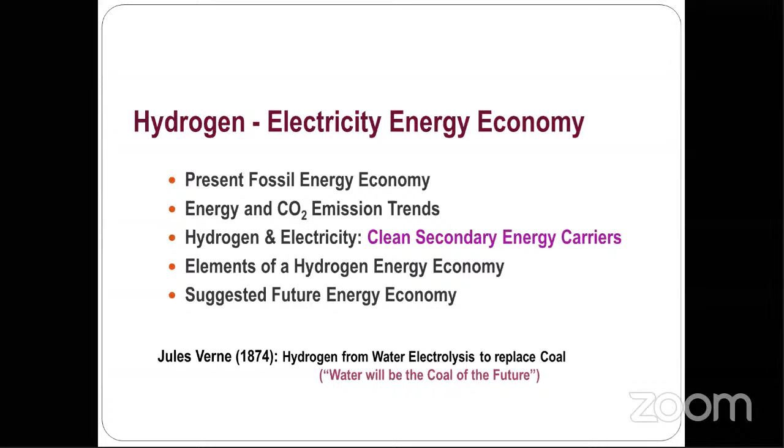Now we will discuss the global environmental challenges. Over the past several years, we have had economic growth, but that is also bringing some environmental issues, like climate change, air quality, and energy security. These challenges are giving opportunity for the automotive industry to change.

If you see this climate change, we want to reduce the CO2 emissions. We have the Paris agreement for 2050, and India will reduce the CO2 emissions before that.

Then we have the air quality problem, like regulation of NOx and so on. Some countries have already taken policies to reduce the NOx.

Again, we have another problem regarding energy security. Recently the Prime Minister has taken a policy, a step called Atmanirbhar Bharat, meaning self-dependency. So in that case, we have to look towards renewable energy development.

Based on all these things, the automotive industry is facing challenges as well as opportunities. So based on this context, we have to avoid fossil fuels. We divided this fossil fuel phase-out into two processes: the first phase is phase-out of fossil fuel vehicles, and then we are going to phase out fossil fuel based power plants.

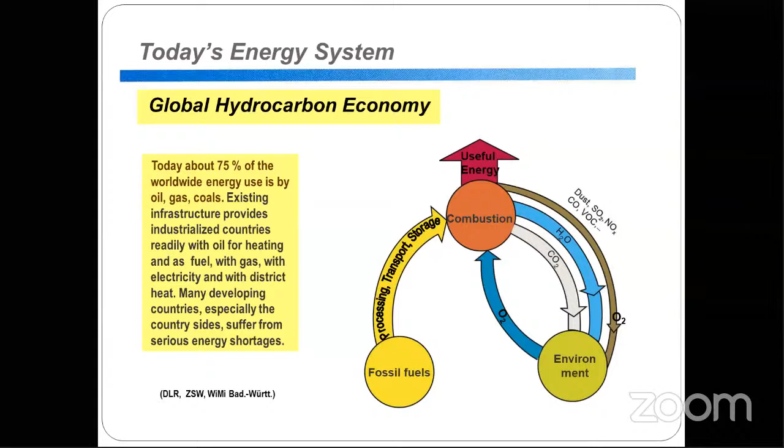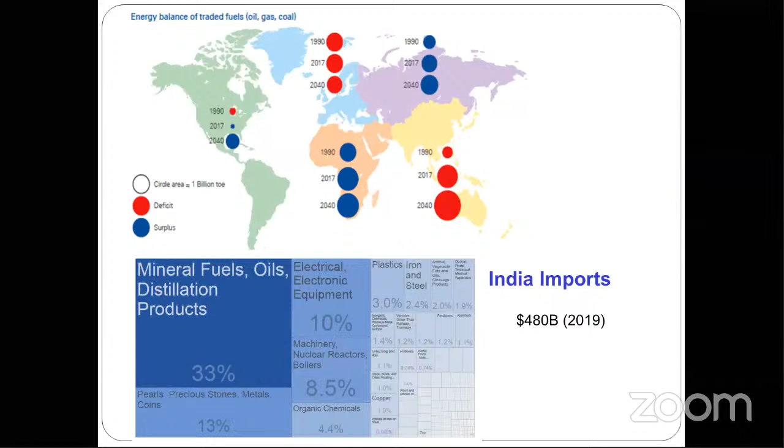If you see in India, maybe in 2020 the energy demand, and after 2040, the energy demand is going to double because our standard of living is increasing drastically, because of energy consumption from homes as well as industries and industrial processes. So we have to generate so much electrical energy. If you want to generate that much energy, you can't depend upon fossil fuels, so you have to go with renewable energy share. Then only you can reduce your CO2 emissions with respect to the Paris Agreement.

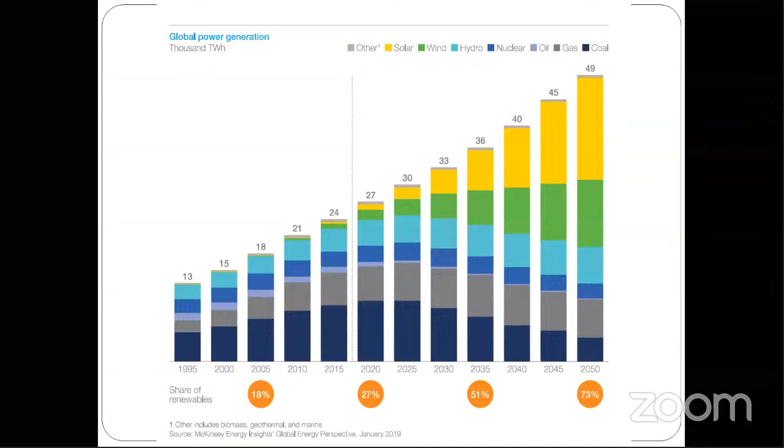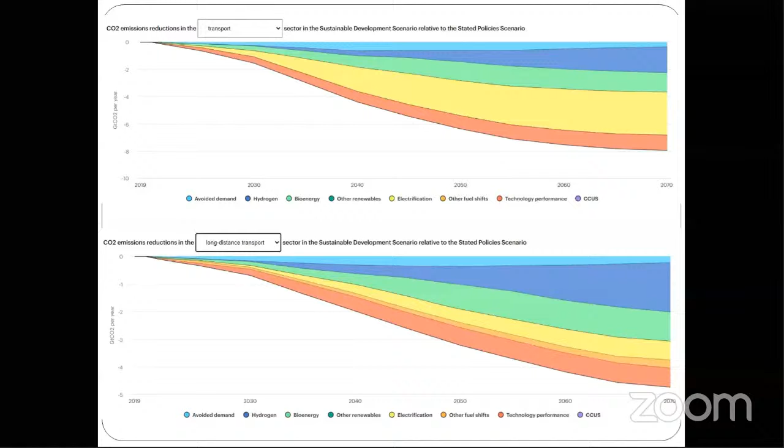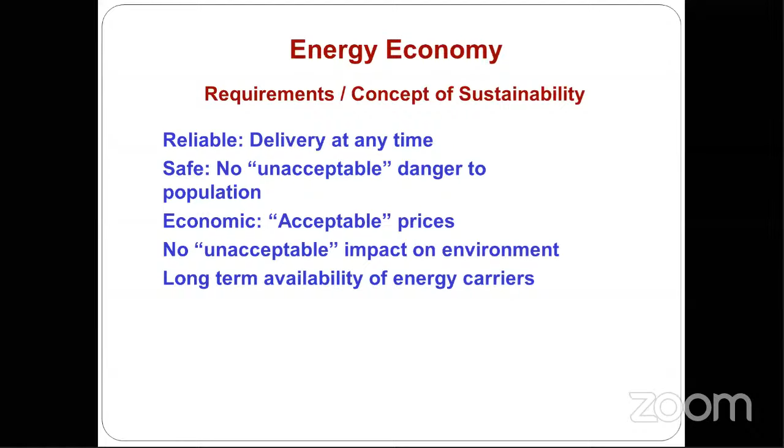Now, if we discuss about the energy economy concept of sustainability - without having any global warming effect, and without depending upon other countries. The energy source should be reliable, delivered at any time, and it should be safe with no unacceptable danger to population. Economically, it should be at acceptable prices, like your solar PV - the tender cost now is 2 to 2.5 rupees per kilowatt hour - and no unacceptable impact on environment, with long-term availability of energy carriers. These are the requirements coming from the concept of sustainability.

Then we have to tackle this global warming from both sides - demand side as well as supply side. From the demand side, you have to design very efficient appliances like air conditioning systems and transport vehicles, then you can reduce CO2 emissions. There is a prediction that if you go for highly efficient end-user applications, you can nearly reduce 80% of projected CO2 by 2030, coming from only the demand side.

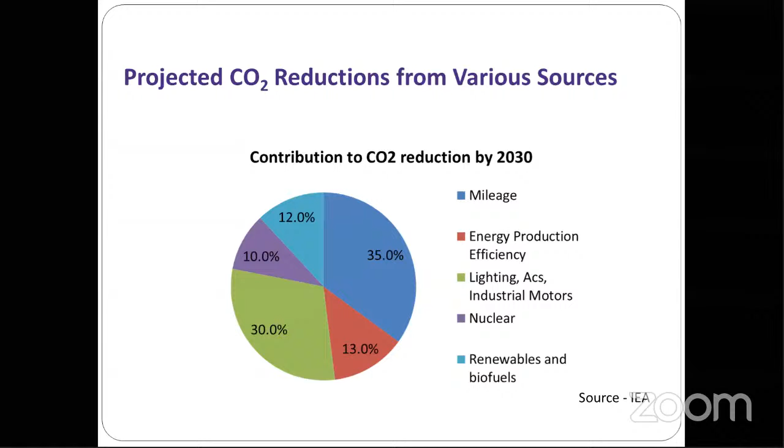Then I will show some policies taken by different countries. First, the European Union agreed to cut around 30% of truck and bus CO2 emissions by 2030. Then, looking at the policies from Norway, they want to ban combustion engine vehicles from 2025 - after 2025 in Norway, they won't sell any combustion-based vehicles. If we take UK and France, they want to ban diesel engine vehicles from 2040, and Germany also has taken some policies to reduce these internal combustion vehicles.

We can also see Asian countries - China has also adapted, moving towards hybrid vehicles, and Korea is planning to ban diesel vehicles from 2030.

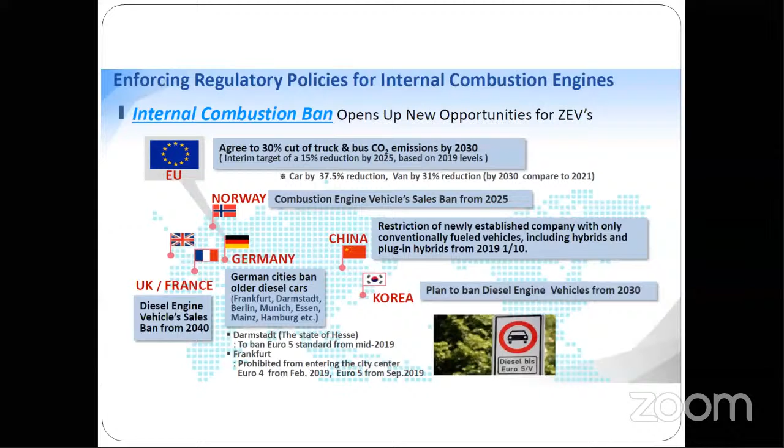So we have two options for going for green vehicles. Either you can use electricity-based vehicles like battery vehicles, or you can go for hydrogen-based vehicles. You can see the replacement of oil for the transport sector, because most countries' policies are aiming that by 2030 or 2040 they want to ban fossil fuel vehicles.

Then what are the long-term options we have? Natural gas will reduce emissions compared to diesel and petrol, but it is still not a long-term solution. Then we have second generation biofuels, which can also reduce CO2 emissions, but the problem is that it can impact the food situation, since we are using land and impacting the environment by cutting forests to cultivate these biofuels, along with use of fertilizers and irrigation and water problems.

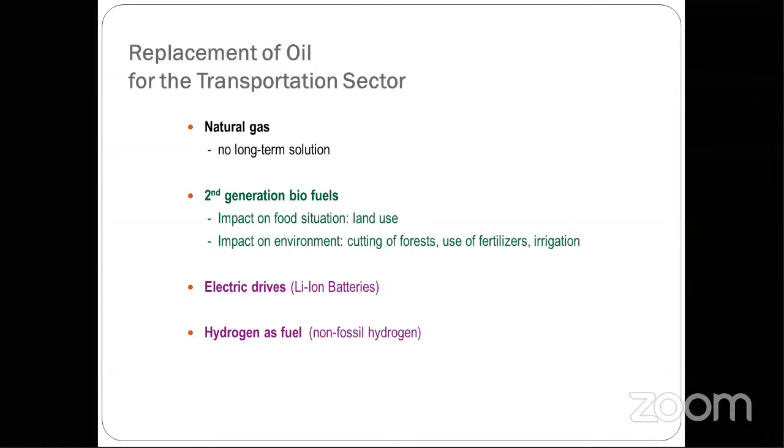First you use the battery, then if the battery is dead, you can go with the ICE engine. So that is hybridization. The next level is electrification, pure clean mobility vehicles, either going with battery vehicles or hydrogen fuel vehicles.

So here I'm going to explain the difference between the fuel cell and battery. Basically, these two are electrochemical devices. Both work on the same principle, but these are not the same.

If you see the fuel cell, chemicals continuously flow to the fuel cell to generate electricity. Whereas in a battery, the chemicals stored inside will be used to convert to electricity. The fuel cell will produce electricity continuously as long as you supply the fuels, whereas the battery, once used, will go dead after a certain period.

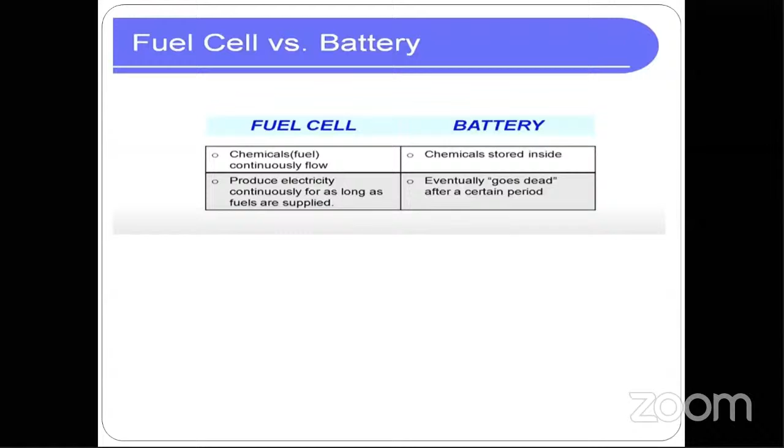So here I want to show the principle of the fuel cell. This fuel cell will have two electrodes and one electrolyte, similar to our battery. You supply the hydrogen from your source to the electrode from the anode side.

So what would happen here? It will dissociate into protons and electrons. From this membrane, the proton will transport, whereas it will stop the electrons. The electron will go to the external circuit. Then it will come to the cathode side, and react with the proton, electron, and oxygen from the air, producing water vapor or water. So this is the principle of the fuel cell stack.

Basically, it will convert the chemical energy from the fuel directly into electricity, and it can produce this electricity with high efficiency compared to an IC engine. So the efficiency of the fuel cell is higher than IC engine efficiency, and there is no noise, because there are no moving parts. We have a small blower to supply air to the fuel cell stack, and the advantage is it can generate power in a stable way, reducing expensive power transmission, with less pollution.

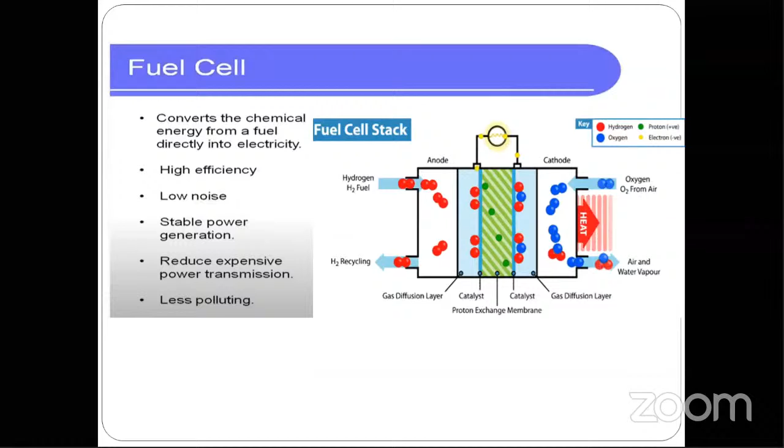So here I want to show a small video about this fuel cell. Then you can understand.

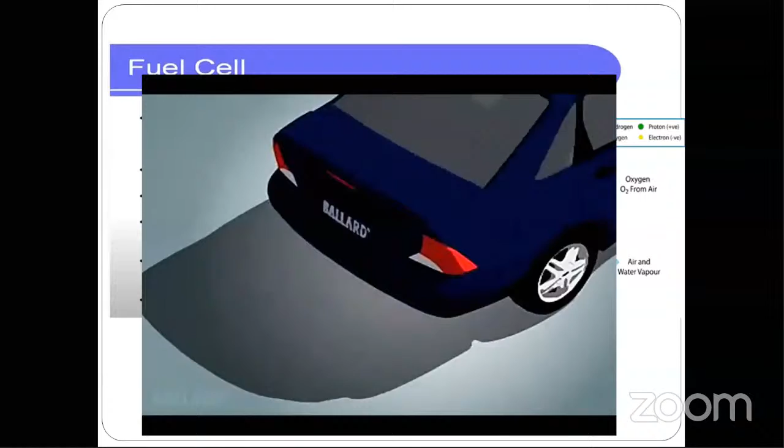So it was a nice video from Ballard. Ballard is actually one of the pioneers in manufacturing fuel cells.

Now I'll show the difference between fuel cells and batteries. As you can see, battery-based vehicles are already on the road, but fuel cell-based vehicles are still in development mode, with some running in Japan, USA, and some European countries. But there is a small difference between these fuel cell vehicles and battery vehicles.

You can see this is the energy storage system volume. If you use battery-based vehicles, as you increase the range, the volume increases drastically, meaning the battery volume will be very high. So obviously your automobile size will also increase, and your electricity consumption will increase.

So obviously, for battery vehicles, there is no competition for low range. If you go within the city, fuel cell vehicles cannot compete with battery-based vehicles. But for long range, like more than 150 kilometers or miles, for buses and heavy trucks, you cannot use batteries because the recharge time is high. It can run only for 50 to 100 kilometers, and recharging takes time. So if you go for hydrogen-based vehicles for long range applications, you can refill within 5 minutes and go for long range like 500 or 1000 kilometers.

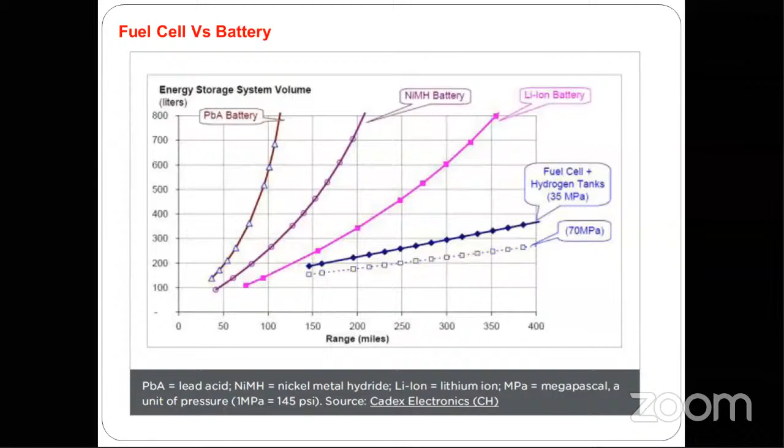So what is the difference between hydrogen and electricity? Basically, both are energy carriers, and they can meet the requirements of all user sectors. If you see the difference, you can store hydrogen easily compared to electricity. But electricity storage cost is higher compared to hydrogen or thermal energy storage cost. That's why we cannot store high amounts of electricity in batteries.

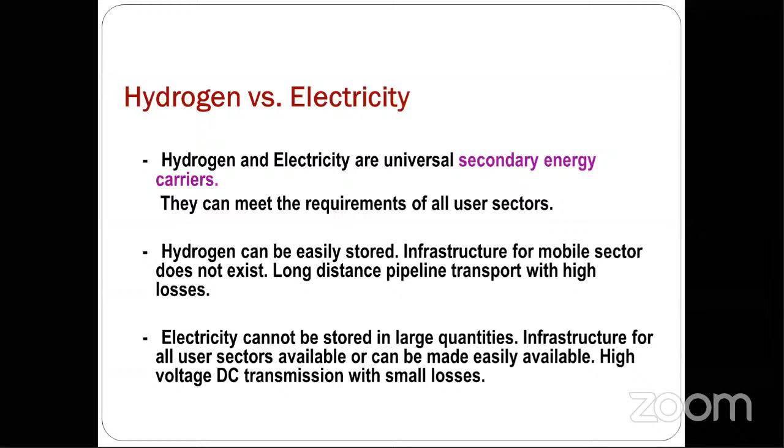As I said, electricity cannot be stored in large quantities. If you want large quantity storage, you should have a lot of batteries, and again the capital cost will be higher. Also, one more problem with batteries is durability—how many times refilling may happen, we don't know.

So why does hydrogen deserve attention? Hydrogen is the smallest of all atoms and has high energy content per unit weight. Compared with gasoline, it has 3 times more energy per unit weight. That is the major advantage of hydrogen, and why we should consider hydrogen as an energy carrier.

One more drawback of hydrogen is that it has very low energy density per unit volume, meaning it requires large storage tanks. But this drawback can be reduced by compressing the hydrogen, or we have other storage methods to increase storage capacity. We started with solids in the 19th century before, then moved slowly to liquids, and the future will be with gases, maybe after 2050. So hydrogen will play a major role in the transport sector.

Here you can see what the hydrogen energy system is, from production to end user. You have to generate hydrogen from various sources, because although hydrogen is abundant in nature, it is not available in free form. It is combined, like in the form of water H2O, or combined with fossil fuels like natural gas, CH4. So to generate hydrogen, you have to supply energy—that is an important factor for this hydrogen economy.

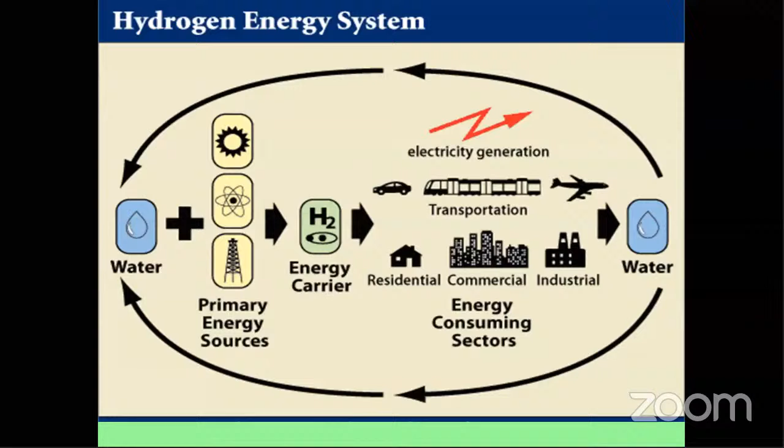So here I will show the world hydrogen economy. Before this, we have seen the hydrocarbon economy. Now we'll see the world hydrogen economy, which is the future economy.

Here we are producing hydrogen by using renewable energy sources. You cannot produce hydrogen from fossil fuels, as that will again give pollution. You have to generate hydrogen from renewable energy sources. Then only it can be called a clean energy carrier.

That hydrogen we can use for transport or some other purpose like combustion, to generate thermal energy. In this cycle, we are using water for generating hydrogen. Again, when combusting or producing electricity in a fuel cell, it is again forming water. So by using hydrogen as an energy carrier, we are not producing any harmful gases to the environment.

As shown in the video, if you see this hydrogen fuel cell electrical vehicle, we have different parts. We need a hydrogen storage system, to supply hydrogen to produce electricity for a long time. Then we should have a fuel cell to convert this stored hydrogen into electricity to drive the automobile vehicle. Then we should have a motor.

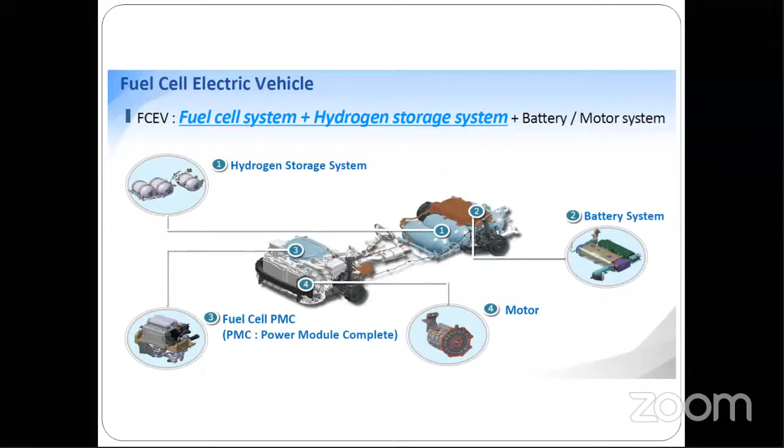So if you see this, the electrochemical reaction of hydrogen and oxygen. As you know, if you combine hydrogen and oxygen in fuel cell mode, it will generate electricity plus some water. Whenever you want to produce hydrogen, in the opposite reaction, you use water and electricity to produce oxygen as well as hydrogen. So this is the basic reaction for fuel cells as well as electrolyzers.

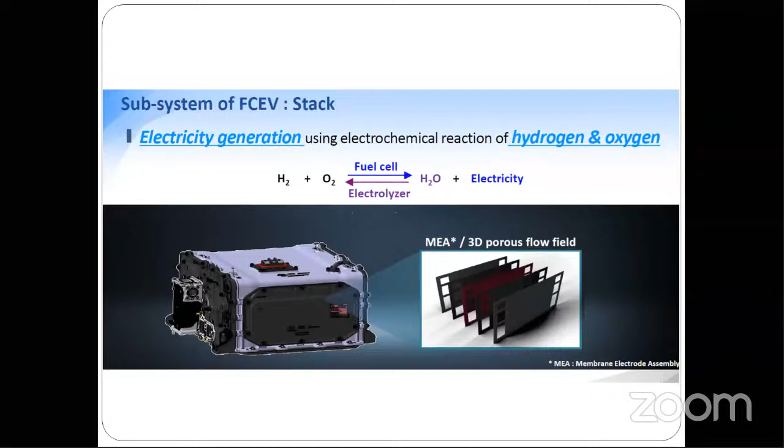So here you can see the different types of fuel cells. We have the PEM fuel cell, called the proton exchange membrane fuel cell, direct methanol fuel cell, alkaline fuel cell, phosphoric acid fuel cell, molten carbonate fuel cell, and finally solid oxide fuel cells. So we have a number of fuel cells.

These fuel cells operate a little differently compared to each other. Some fuel cells we are supplying hydrogen, and some fuel cells we are supplying like fossil fuels and so on. If we look at the temperature range, each one has a different temperature range. The applications also will be different based on this temperature range. Just we'll see here.

If we see the direct methanol fuel cell, here we are using electrolyte as a proton conducting membrane, similar to the PEM fuel cell. But if we see the alkaline fuel cell or phosphoric acid fuel cell, we have different electrolytes, like concentrated phosphoric acid for one, and potassium solution for the second. Then the molten carbonate fuel cell uses molten carbonate as electrolyte, and the solid oxide fuel cell uses ceramic material as an electrolyte.

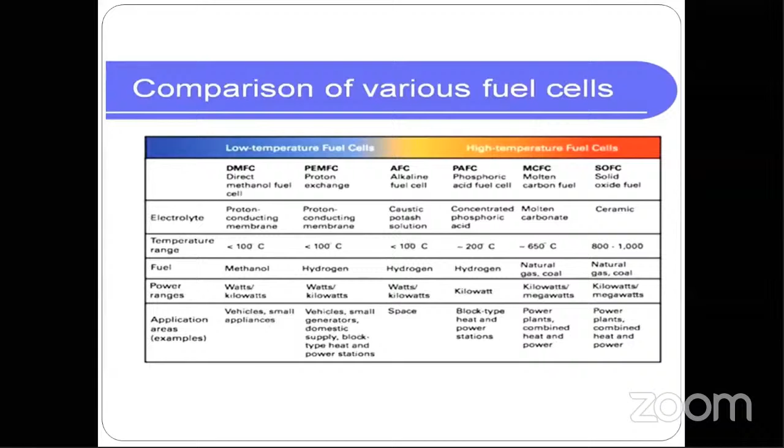So as I explained, this polymer electrolyte membrane fuel cell, the PEM fuel cell, is best suitable for transport applications.

So here we can see the brief history of the PEM fuel cell. Basically, the concept started in 1839, given by Sir William Grove. He demonstrated the basic operating principle of the fuel cell.

Then it was reinvented by Francis Bacon, who started working on practical fuel cells in 1937. By the end of the 1950s, he was able to develop a 6 kilowatt fuel cell — a tremendous effort, since he started in 1937 itself.

Then the first practical application was done by General Electric, called GE, for the Gemini program in the 1960s for NASA application.

Then we started for terrestrial applications. General Motors experimented with a fuel cell powered van with cells from Union Carbide in the mid-1960s. After that, they forgot about terrestrial applications for this fuel cell, and it was only used for space applications.

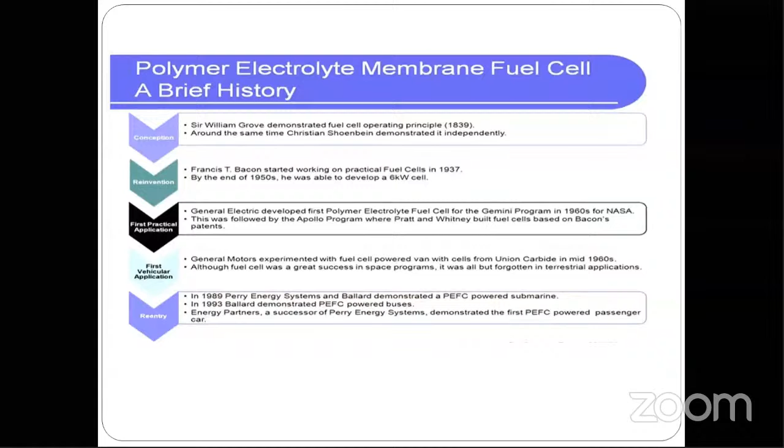Again, fuel cells re-entered in 1989. Perry Energy Systems and Ballard demonstrated a PEM fuel cell powered submarine, and in 1993 Ballard, as shown in the video, demonstrated PEM fuel cell powered buses. After that, the movement started to develop these PEM-based fuel cells for transport applications. So this is the brief history of PEM-based fuel cells.

So here you can see the PEM-based fundamentals, what we have discussed and what I have shown in the video. So here we have a bipolar plate — basically it will supply the fuel as well as remove the reactants.

And here you can see we have a gas diffusion layer, which will distribute the fuel as well as reactants. Then once the fuel, the hydrogen, comes to this catalyst layer, it will dissociate into proton and electron. The proton will transport through the membrane.

Then again, here there's one more reaction with proton, electron and oxygen coming from the gas diffusion layer. It will form water and it will be removed from this side. This is the basic structure of the PEM-based fuel cell.

Here you can see the basic reactions: at the anode, as I explained, H2 will be dissociated into protons and electrons. At the cathode side, the oxygen, proton and electron will combine to form water vapor. The overall reaction: hydrogen plus oxygen goes to water.

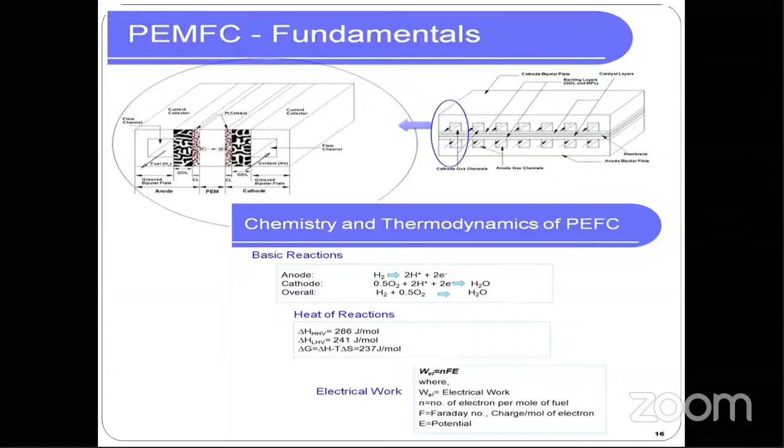Assuming all the Gibbs free energy could be converted into electrical work, the maximum cell potential we can achieve theoretically is around 1.23 volts — that is the maximum voltage from one cell. Based on this, you can calculate how much efficiency you can generate from the fuel cell. If you go with HHV, you can produce around 83% conversion from hydrogen to electricity, whereas if calculated based on LHV, that will give 94%. So this percentage is very high in terms of energy transfer from one form to another, like chemical to electricity.

If you see these IC engines, the efficiency is just 30 to 50% maximum we can get. Compared to that, fuel cell is highly efficient compared to IC engines.

Maybe you have some doubt how it can convert more efficiently than Carnot, because Carnot says that the Carnot engine is the highest efficiency. So there is a myth here. Basically, this PEM fuel cell is not a heat engine but an electrochemical engine, so therefore this Carnot efficiency limit is not applicable here.

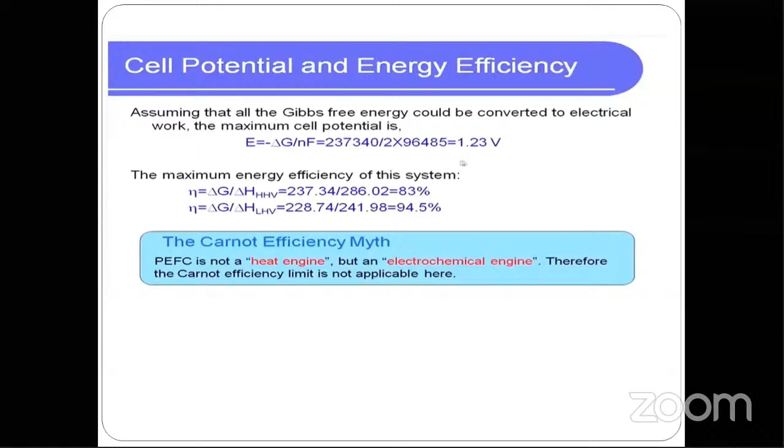Now we'll see the different components of fuel cell. First we'll see the electrolyte. Basically, this is a polymer membrane electrolyte. This PEM derives its name from polymer electrolyte membranes.

The role is these membranes are solid electrolytes that can conduct protons but are impermeable to gaseous phase. This electrolyte has to transport only protons.

That is the main role. If you see the materials, what we are using here, we are using this perfluorocarbon sulfonic acid ionomer. Basically these are called Nafion membranes. Nafion is the best known membrane till now, produced by DuPont company.

The thickness, if you see, is very small, 20 microns. The desired properties for electrolyte: it should conduct the protons efficiently, and also it should be chemically inert and mechanically strong against swelling. So this is the basic function of electrolyte.

Then if you see the catalyst layer in PEM fuel cell, the catalyst layer is very thin. It is in between the electrolyte and gas diffusion layer, as I showed in the video as well as the previous slide. The role is the desired reactions take place at this site and current is produced.

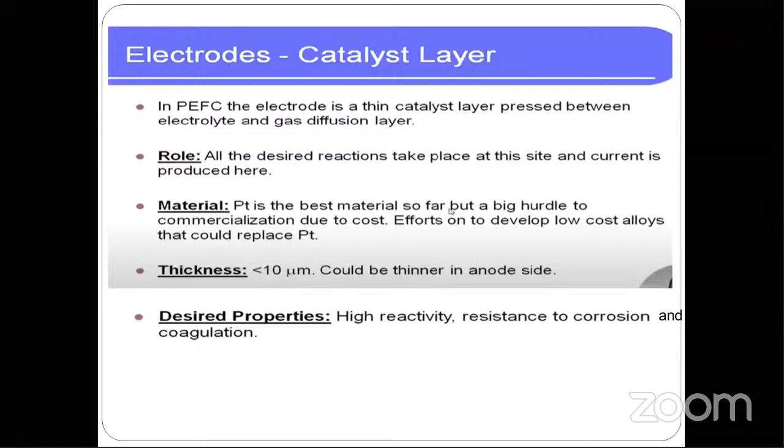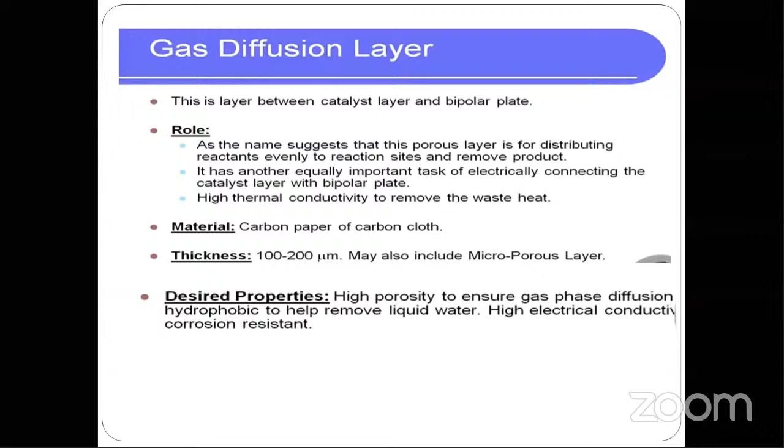Then finally, we have the bipolar plate. Basically, this is called the current collector. This is the outermost component with the gas channels, supplying reactants or removing products.

Basically this is the outer layer of the cell. The role here is it is connected to the outer circuit and drives the current, and also removes the waste heat generated in the fuel cell, because as I explained, this reaction is exothermic, and it should provide structural strength to the total cell. The material basically used is graphite.

Thickness is the highest for this material in the fuel cell, up to 1 mm. The desired properties are high electrical and thermal conductivity, to transfer electricity as well as heat to adjacent layers, along with corrosion resistance and mechanical strength.

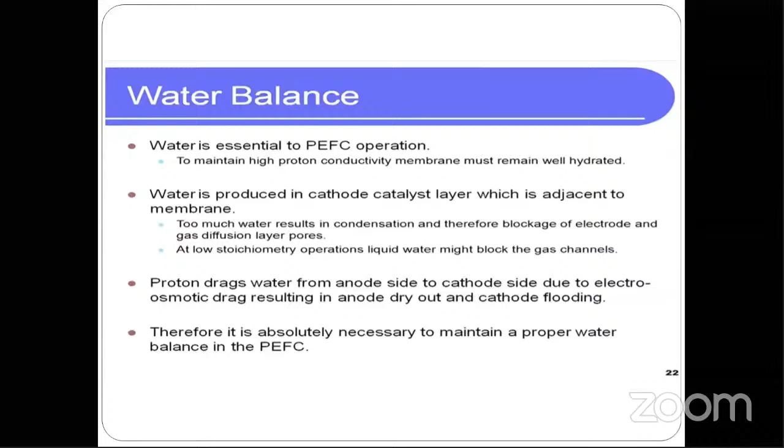Now moving to hydrogen production, the present technologies. At present, we produce hydrogen from various processes. The major stakeholder is steam reforming of natural gas, producing around 48%. Then partial oxidation of heavy hydrocarbons, contributing 30% of global production, and partial oxidation of coal, producing around 18%. Then we have electrolysis, around 4% of global production.

But if you want to use hydrogen as a green fuel or clean energy carrier, you have to produce it from renewable energy sources, not from steam reforming or partial oxidation, because at present the hydrogen production cost from electrolysis is higher than the other processes. That's why the majority is produced from steam reforming or partial oxidation of heavy hydrocarbons. But now, electricity cost from solar PV is decreasing drastically, around 2 to 2.5 rupees per kilowatt hour, so hydrogen production cost from electrolysis will also reduce further.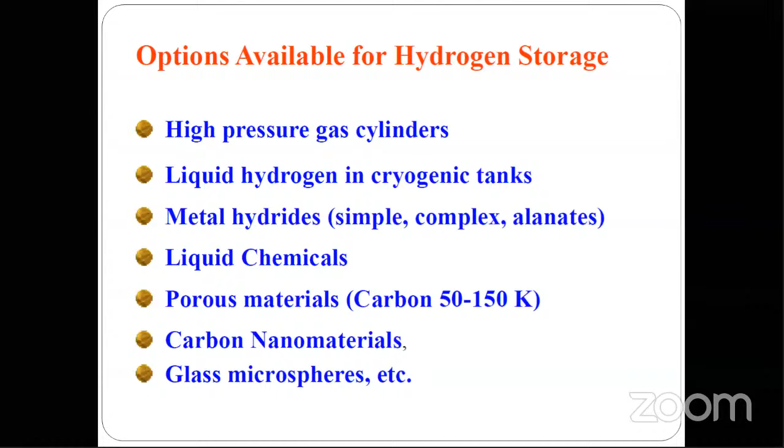We'll see these one by one, starting with the conventional methods. The first conventional method is high pressure gas cylinders. Hydrogen is a very light gas, so it will take a huge volume if stored at atmospheric pressure. So to reduce the volume, we pressurize the hydrogen up to 800 bar.

But the problem here is that it is not safe to have an 800 bar or 700 bar cylinder with you in the vehicle. Another disadvantage is that to pressurize hydrogen to 300 bar, you have to spend around 18% of the hydrogen's energy. So just for compressing, you are already losing 18% of the energy from the hydrogen. That is one of the main drawbacks of high pressure gas cylinders.

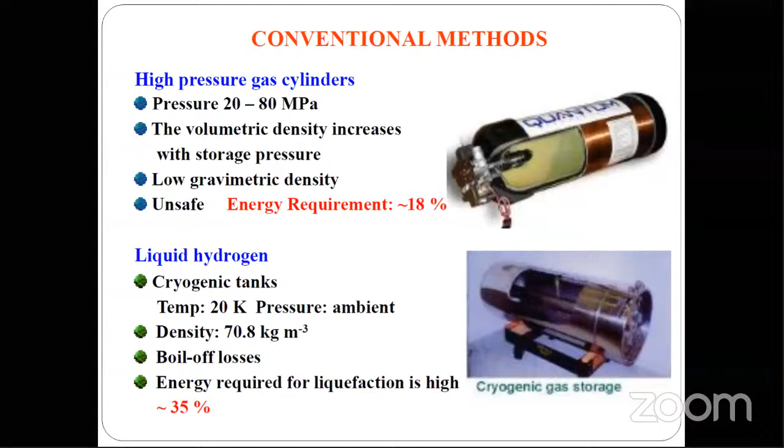For transport applications, the Department of Energy of USA has set targets: for transport vehicles, we need storage capacity around 5-8%, and operating temperature should be minus 20 to 50 degrees centigrade. The refilling time should take only 1 minute for refilling around 0.5 kg of hydrogen. The delivery pressure from the solid cylinder should be above 2 bar, because this has to supply to the fuel cell to generate electricity. So these are the storage container requirements from the Department of Energy USA, that is called DOE. They have set these conditions to design the proper storage tank for hydrogen based vehicles.

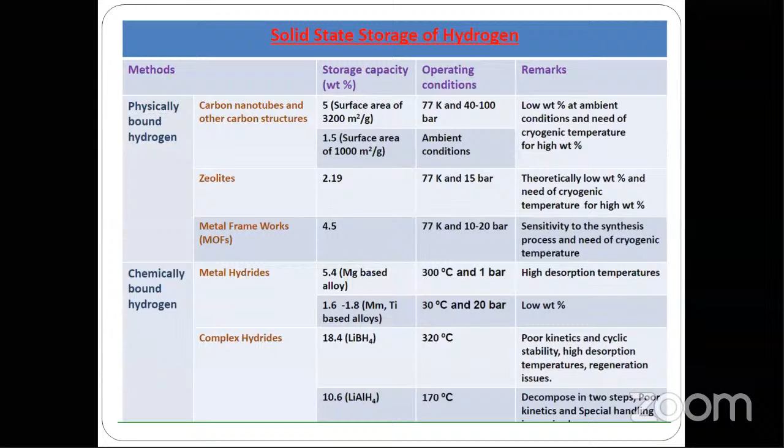Then if you see the metal hydrides, the reversible chemical heat storage. Here we are using some intermetallic compounds forming with different metals by either using ball milling or melting for hydrogen storage operation.

If you see the reactions, absorption is like you have a material, metal, which combines with hydrogen to form metal hydride, and since the reaction is exothermic, it will release some heat. If you want to get back this hydrogen, you simply supply heat. Then the metal hydride will release hydrogen and become intermetallic again. So the operation is very simple - if you want to generate the stored hydrogen from metal hydride, just supply heat at different operating conditions, and you can get the hydrogen from the storage tank.

If you see the heat values, we have 15 to 75 kilojoules per mole. For low temperature applications, that will be around 20 to 30 kilojoules per mole, whereas if you go for magnesium based hydrides, you have to give a high amount of energy.

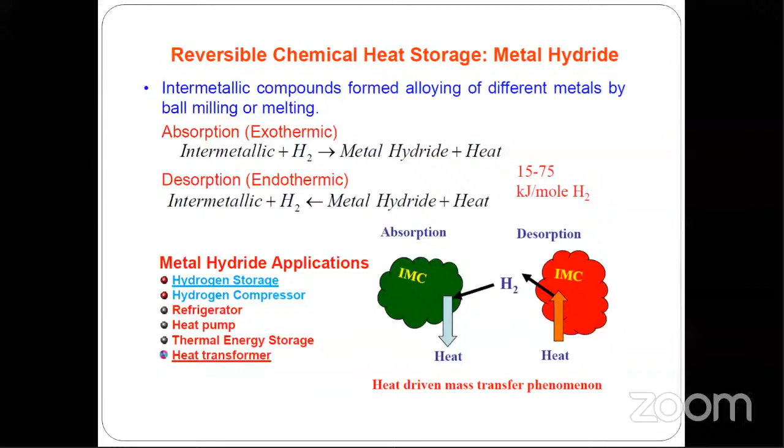The absorption process completes. Desorption is the reverse - hydride decomposition. Again we have diffusion, surface penetration, and recombination and desorption to the gaseous phase. So in desorption process you get the hydrogen, whereas in absorption process the hydrogen is absorbed by the metal hydride.

So you can say metal plus hydrogen becomes metal hydride. In the absorption process it releases heat - an exothermic reaction. In the desorption process, you just supply heat, and it will recombine into metal plus hydrogen.

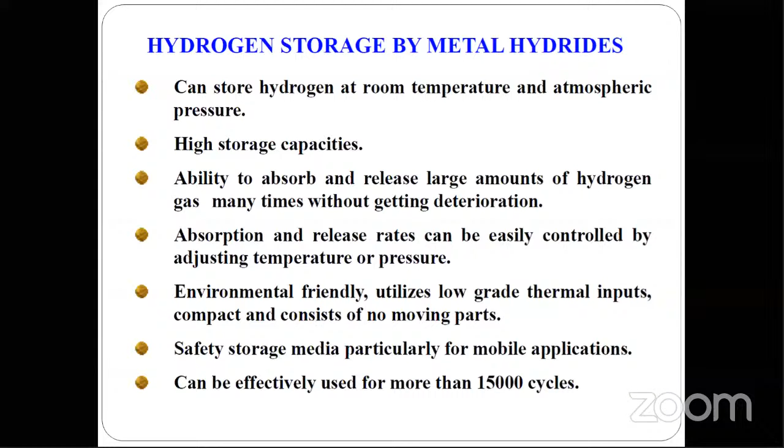Here you can see the PCT isotherm for hydrogen absorption. Once the hydrogen absorbs, the concentration increases, and after the limit, the pressure will increase again. These are shown at different temperatures and pressures. Based on these pressures and temperatures, we can construct many engineering applications using these metal hydrides to convert energy from one operating condition to another.

So energy conversion takes place from high temperature to low temperature and low temperature to high temperature. These are the various energy conversion devices - you can use these metal hydrides for heat pump, refrigerator, heat transformer, and thermal storage. Professor Anil Kumar will explain about these various applications of metal hydrides.

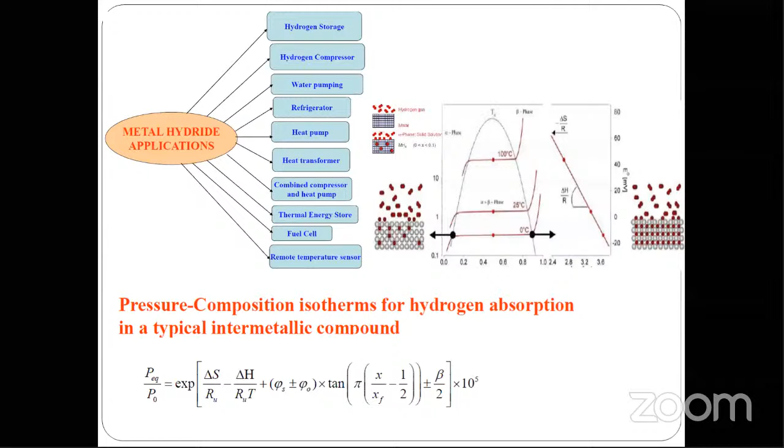So the advantage is that it is basically environment friendly. It can use low grade heat energy and is compact in construction. And if you see these devices, there are no moving parts, no liquid circuit. Hence it can operate at any orientation, not like our absorption systems like heat pumps. And these reactions can be controlled by varying supply pressure and temperature, as these are heat driven mass transfer phenomena.

So I have explained why hydrogen is the alternative fuel, given the limited availability of fossil fuel and increasing energy demand. We can also see that hydrogen has the highest gravimetric energy density compared to gasoline, almost 3 times higher. Also, hydrogen based fuel cell vehicles can convert this energy from one form to another with up to 90% efficiency, whereas in case of IC engines you get only 45% conversion efficiency.

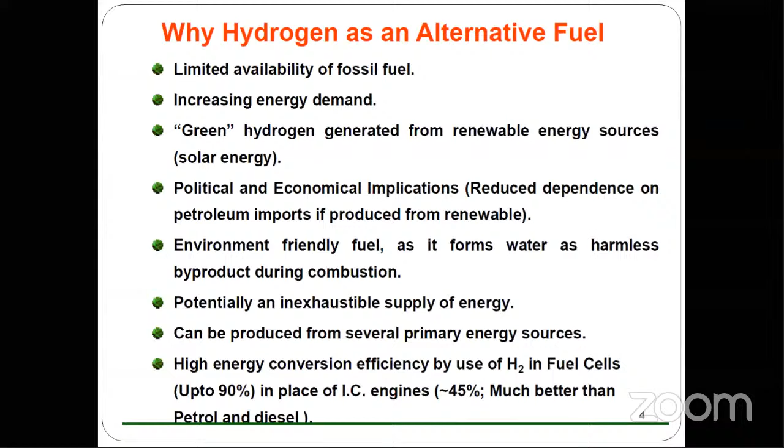As I told, if you want to desorb the hydrogen, you have to supply heat because it is an endothermic reaction. So we are supplying the energy with respect to water. Also, if you see the metal hydrides, the problem is that they have very low thermal conductivity. So if you want to supply heat to the metal hydrides to desorb the hydrogen, you have to enhance the heat transfer within the tank. So here we have used a fin type heat exchanger to enhance the heat transfer in the storage tank.

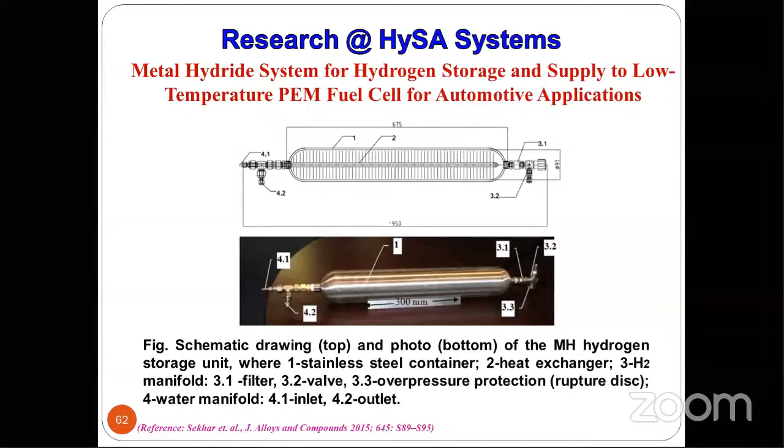So the fifth one is the heat exchanger from the metal hydride container, and this is our heat exchanger in the metal hydride container. And the sixth one is air-liquid heat exchangers. And the last part is the fuel cell stack.

So here you see we have integrated these two through thermal integration, because I explained the fuel cell reaction is exothermic. If you supply hydrogen, it will generate both electricity and heat. And again, for this operation of the fuel cell, we have to supply hydrogen from the storage cylinder, and again this reaction is endothermic, so we have to supply heat to desorb the hydrogen. So we have thermally integrated these two: one generates heat, and one needs to take heat to generate hydrogen to supply to the fuel cell. So both are interconnected through heat exchangers.

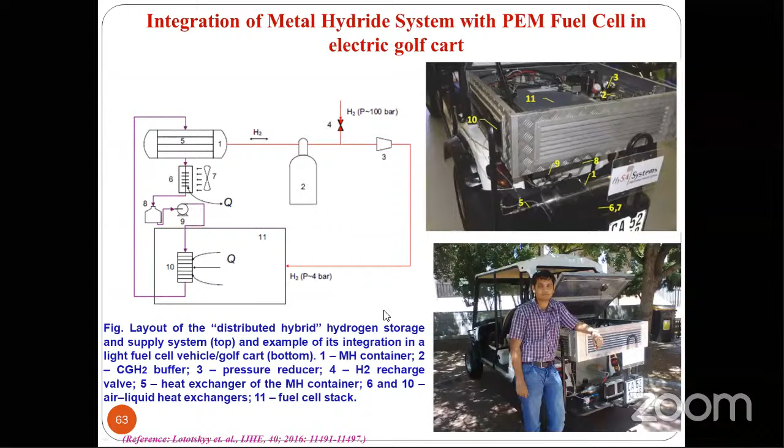So what we have done is initially we removed this buffer storage and tested this fuel cell for a golf cart. It works for almost 1 hour because we used a small container for hydrogen storage, just to test this integrated system and how it is working for the golf cart.

If you see the temperature of this tank, because of low thermal conductivity of these metal hydrides, it is unable to supply heat fast enough at the required rate to generate hydrogen. So it will desorb the hydrogen but take the sensible heat from itself to release it, so the temperature decreases inside the cylinder. Once the temperature decreases, the pressure also decreases as per the PCT curve shown previously.

Because of that, the pressure output supply of hydrogen is less than the required pressure inside the fuel cell, so the fuel cell will stop. Even though it still has some hydrogen content in the cylinder, it is unable to supply at the required pressure because the temperature inside the cylinder is low. So it stopped after 55 minutes.

Next, what we have done is we added a buffer cylinder, and then supplied hydrogen from both. So you are taking less hydrogen from the cylinder compared to the previous case, so the heat requirement will be less, and whatever is supplied will be more than enough to keep the temperature constant.

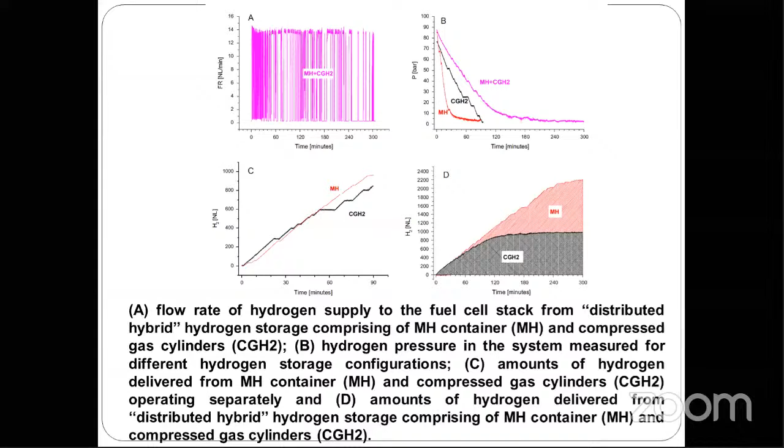We have also designed one more thing, a hydrogen compressor for hydrogen refuel vehicles, because as I explained, if you want hydrogen-based fuel cell vehicles, you need infrastructure to refill the hydrogen. So for that we have many ways to compress hydrogen.

One way is you can compress hydrogen by mechanical compressor, but for that you have to supply high grade energy, that is electricity, which is not an efficient way.

Here we have developed the metal hydride compressor. It can compress hydrogen by taking some waste heat from industries. Suppose you have waste heat at low grade, 120 to 140 degrees, from industry, that heat acts as the driving force to compress hydrogen using these metal hydrides. So we have designed a 3-stage compressor that can take input at 3 bar and deliver hydrogen at 200 bar, up to 5 normal meter cube per hour.

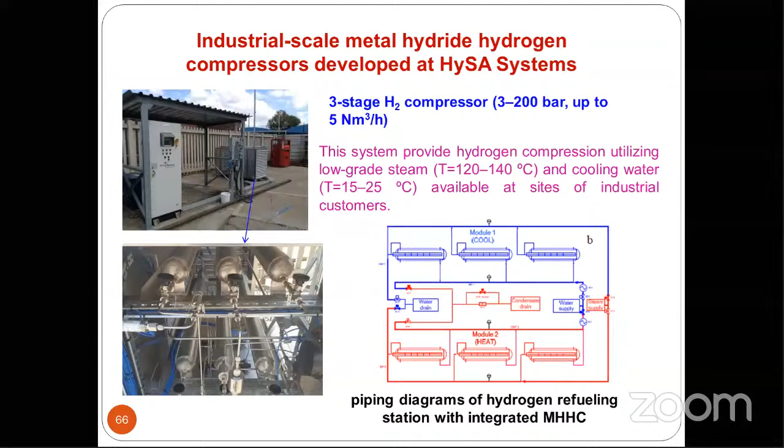So here we have 3 stages to compress the hydrogen. In the first stage, using a different composition, we can compress from 3 bar up to 20 bar. In the second stage, using different material, we compress 20 bar to 50 bar. And in the third stage, 50 bar to 200 bar, again using different materials, because these materials are chosen based on their PCT concentrations, pressure versus temperature and concentration, as I have shown earlier.

So by using this low grade heat, you can compress hydrogen without using a mechanical compressor. We have tested this compressor and it achieved up to 200 bar. This system can be used for hydrogen refueling stations, as we need to generate hydrogen infrastructure for hydrogen-based transport vehicles.

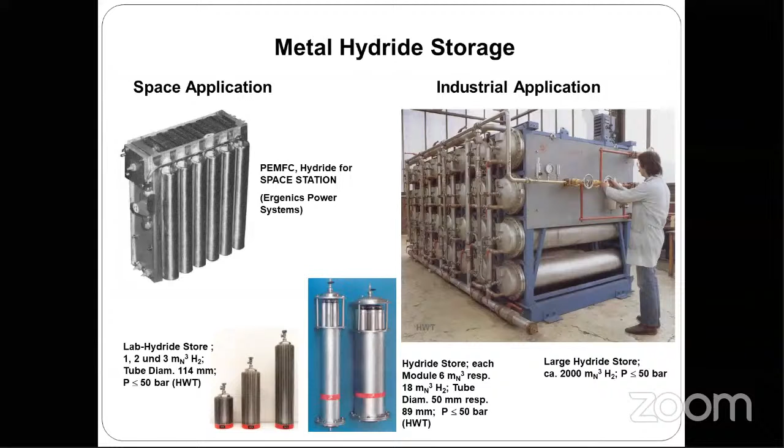Now I'm going to move to the next topic, energy storage. As you know, we are moving towards renewable energy. If you take solar and wind, we have huge potential compared to present world consumption. But the problem is these two are intermittent in nature, so the demand and supply may not match.

So in that case, we should have some storage media to store the energy. Whenever your supply is more than demand, that amount has to be stored, and whenever demand is more than supply, the stored energy has to supply to the grid. The storage media is very important for the next one or two decades, because if you increase your renewable energy share in the grid, the grid has to balance both supply and demand. So if you increase the renewable energy capacity to like 20 to 50%, you need a better storage system to store that amount of energy.

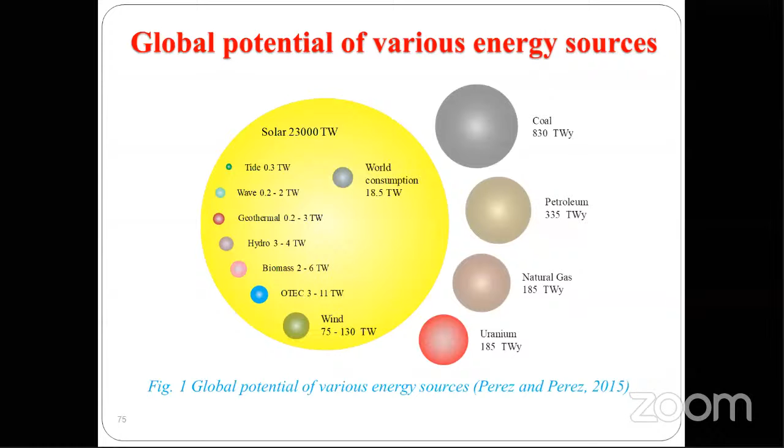So what this system does: whenever the electricity supply is more than the demand, that excess electricity will be used to generate hydrogen using the electrolyzer. Then whenever the demand is higher than the supply from the grid, the stored hydrogen will be used to generate electricity using the fuel cell, so that electricity is supplied to the grid or applications. In this way we can store excess energy from the grid and deliver it whenever demand is more than supply from the renewable energy source.

So this system can be used as a storage media for renewable energy sources. One more advantage is that we are not only producing electricity, we are also producing some heat, which can be used for other applications like space heating, water heating, and so on. Also, for hydrogen-based vehicles, this stored hydrogen can be supplied as a refilling station to supply hydrogen to hydrogen-based vehicles. So this total system can store intermittent renewable energy and supply electricity, hydrogen, and thermal energy.

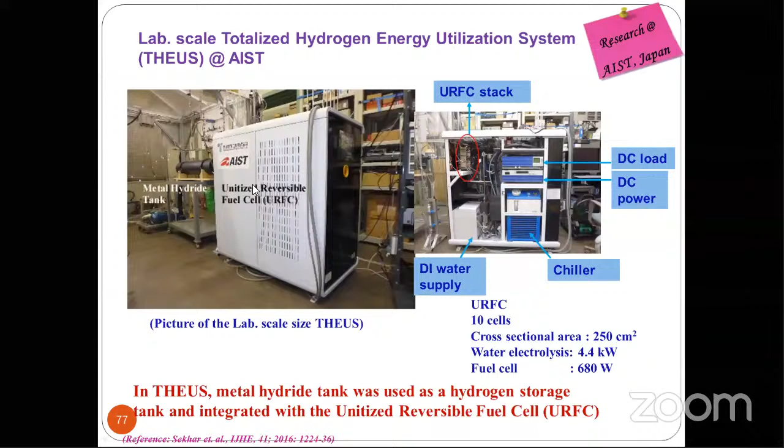So here we have used Nafion 115 as the membrane in the fuel cell. For the catalyst, we have platinum-based catalyst on the hydrogen side and platinum iridium oxide on the oxygen side, and the gas diffusion layer, like carbon paper as discussed, on the hydrogen side and titanium felt on the oxygen side. The bipolar plate we used is titanium-based. This is our stack configuration in the URFC — total we have 10 cells.

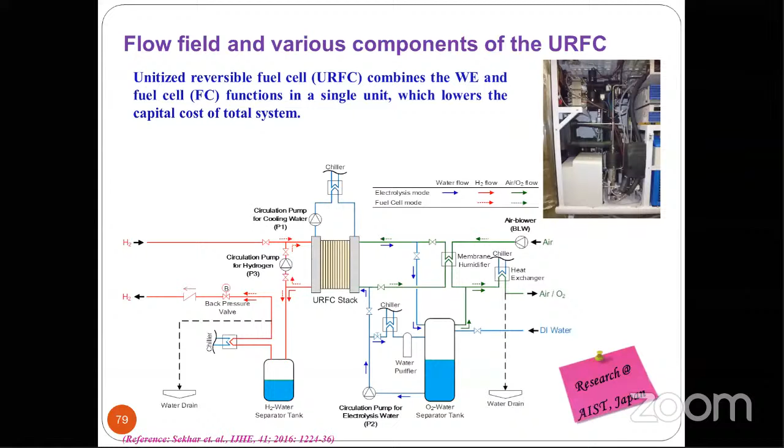And we are controlling the temperature within the fuel cell. So in this way, we can combine electrolyzer operation as well as fuel cell operation in one equipment. So that is the URFC.

As I explained, it can work as both electrolyzer operation as well as fuel cell operation, and also it can bring the capital cost down compared to using individual electrolyzer and individual fuel cell. And it also has a higher operating ratio per device.

Obviously, this device will be used for like 24 hours almost, because either you will use one mode. If you have supply more, then you use electrolyzer mode. If your supply is less and demand is more, obviously you use fuel cell mode. So you'll use this URFC more efficiently, and obviously have less maintenance parts compared to individual systems.

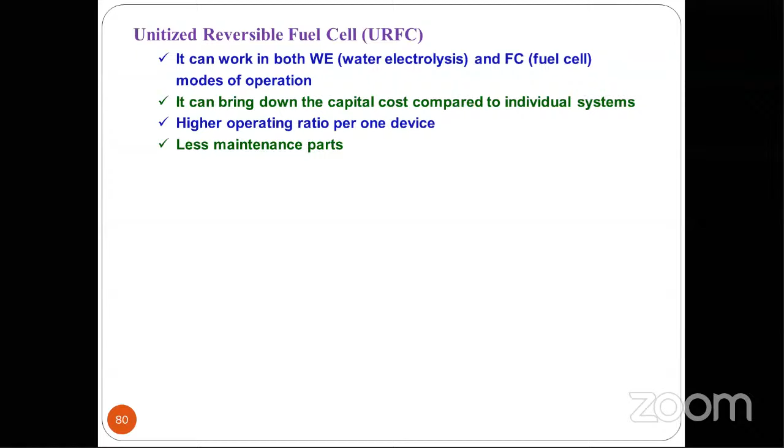Hydrogen storage, as I explained, you can have compressed form, liquid form, and solid form. Obviously, here this is a stationary application - you have to remember that this system is a stationary application. So here the weight is not a problem, so you can use metal hydrides efficiently here to store the hydrogen at ambient pressure and temperature over a long period of time.

So you want to increase this reaction kinetics, meaning absorption, desorption kinetics. Then obviously either you have to absorb, meaning remove the heat fast in the absorption process, or you have to supply heat very fast in the desorption process. So to enhance the heat transfer inside the tank, we use this double coil heat exchanger.

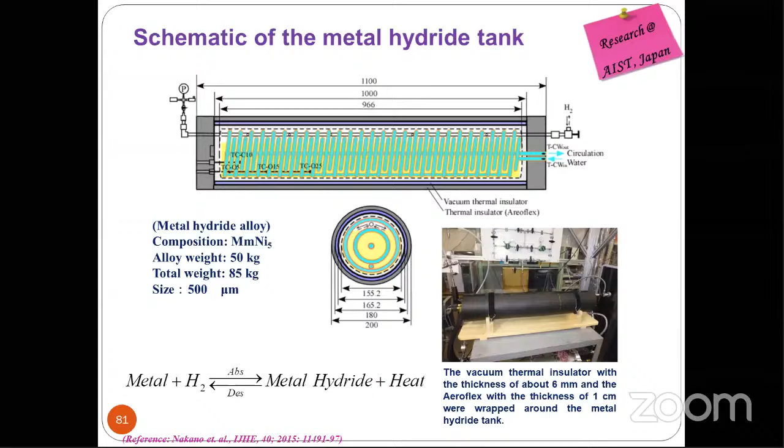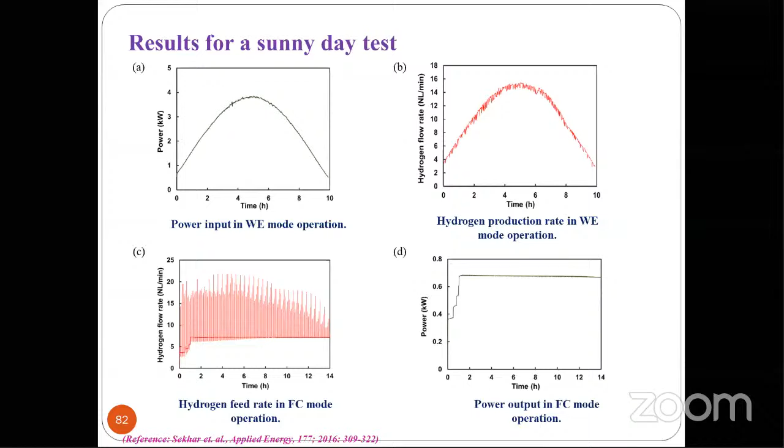So these are the various performance parameters. I'm not going into it.

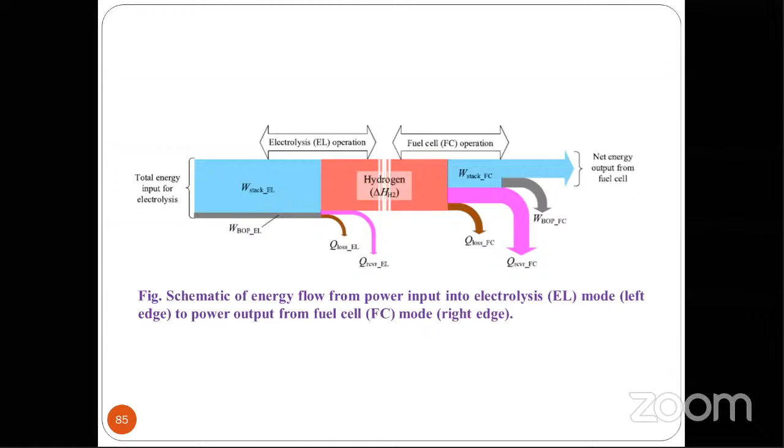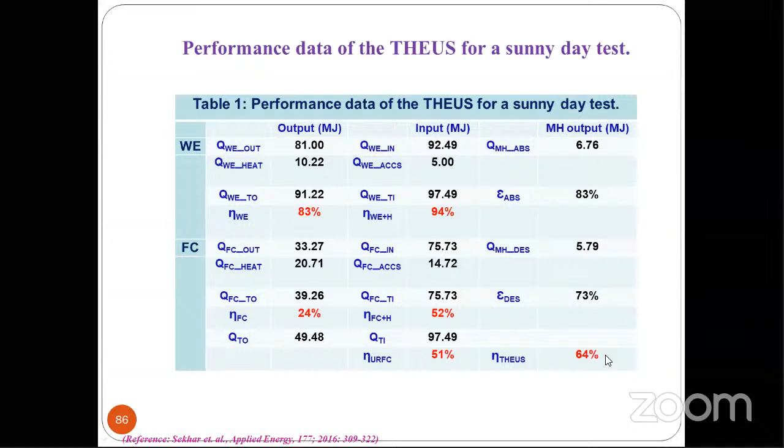We again tested the same system for a cloudy day, because as you know, on a cloudy day the power will fluctuate. We want to test how much it withstands with respect to fluctuating power. Stable power obviously generates efficiently, but we wanted to test how the electrolyzer works with this fluctuating power, without having any deterioration or operation problem.

Okay, then again similarly we have operated 14 hours operation of fuel cell to generate back that electricity by using the stored hydrogen.

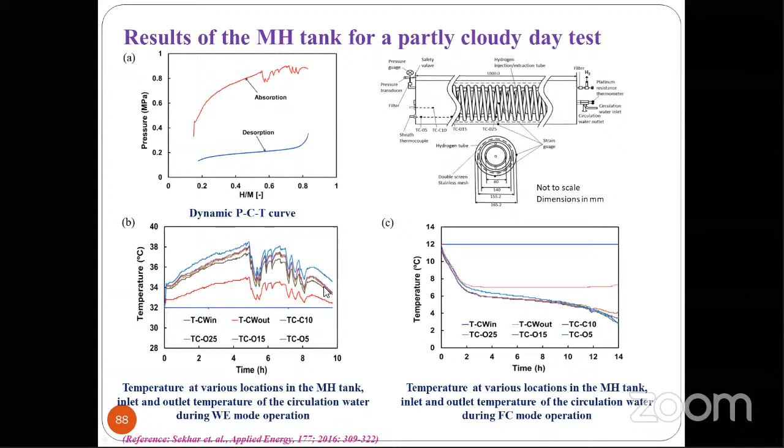The excess power, whenever the wind power is more, that will be given to the electrolyzer for hydrogen generation, and that will be stored in the hydrogen storage tank. The heat will be generated here. They are storing hydrogen, and the stored hydrogen will be supplied to the CHP plant, meaning the fuel cell for heating as well as electricity.

The stored hydrogen will also be used for the hydrogen refilling station, to refill hydrogen based vehicles.

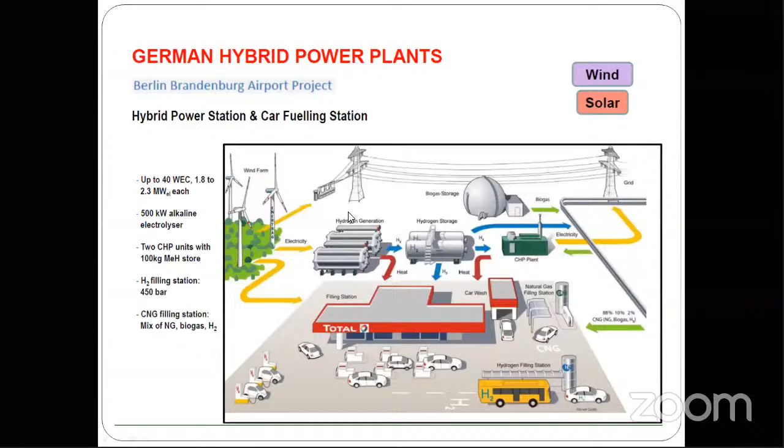Same thing we can use for solar thermal power plants. I think you know the advantage of solar thermal plants compared to solar PV. Solar PV is obviously a cheap technology, so you can generate power at 2 to 2.5 rupees per kilowatt hour, compared to solar thermal, where now the least tender cost is around 7 rupees in the Middle East.

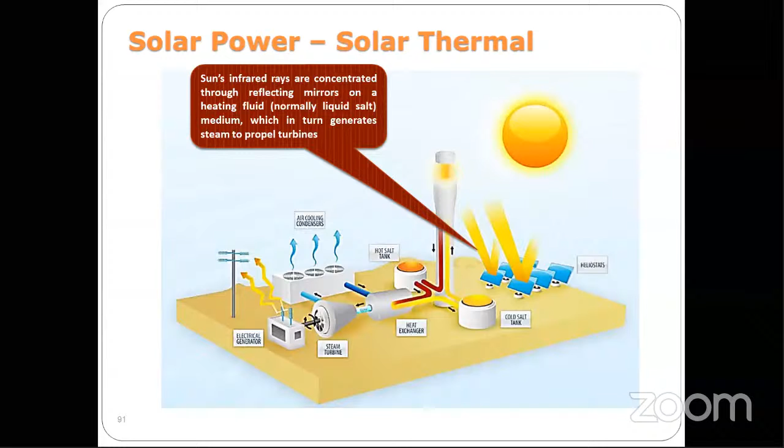But the advantage of solar thermal compared to solar PV is that in solar thermal you can store the energy compared to electrical energy. Even electrical energy you can store, but the cost of storage is less in the case of thermal storage compared to electrical storage.

We have different kinds of thermal storage systems: one is sensible, latent, and reversible chemical. If you compare sensible and latent with chemical storage, the energy density is low for sensible and latent. We can use some metal hydrides for storing the hydrogen.

So here I have shown the system. We have two systems, one high temperature and one low temperature. Whenever your thermal energy is more than your heat exchanger or cycle requirement, meaning the power conversion cycle - suppose you have a 50 megawatt power conversion plant with a 50 megawatt turbine, you have to supply thermal energy almost 3 times more than 50 megawatt, because the conversion efficiency is around 30 to 40%. So you will supply around 150 megawatt of thermal energy, or maybe around 120 to 130 megawatt.

But sometimes what we do is have solar panels with more capacity than this 130 megawatt, so that extra heat will be stored here during morning time. You supply this heat to the metal hydride, it will desorb and go to the low temperature metal hydride, and it will release heat to water at 30 degrees centigrade.

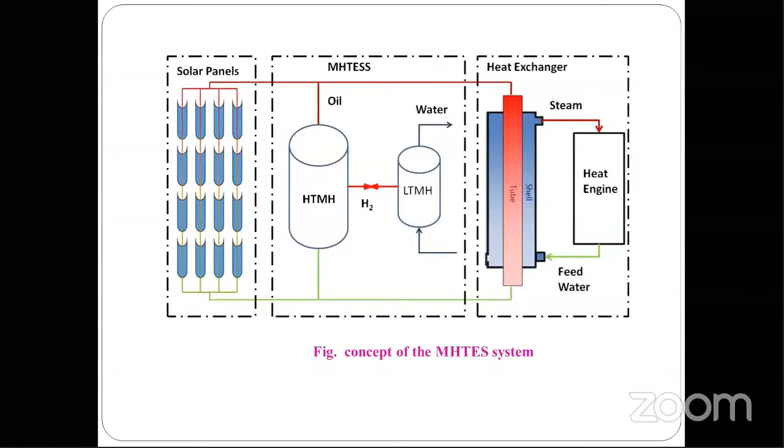This is the operating principle. As I told, here we have two reactors. One reactor will desorb the hydrogen and the second reactor will absorb the hydrogen at different operating conditions.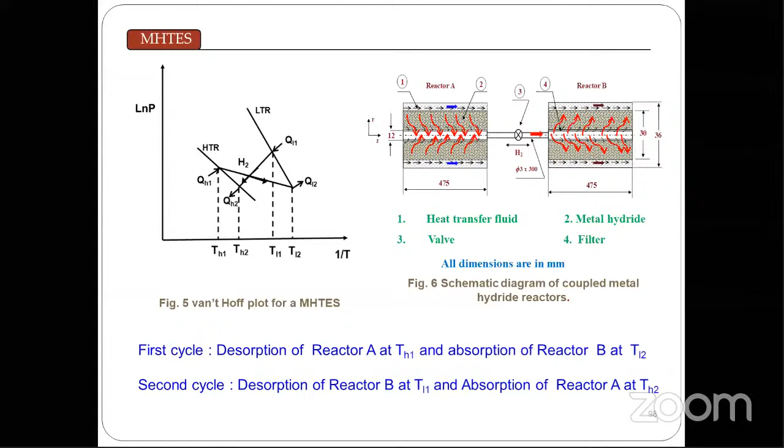So here I will show this. We are passing the heat transfer fluid and it will desorb hydrogen, and the same thing will be absorbed by another reactor, and that heat we are taking. By playing with the temperature and pressure, we can store the hydrogen as well as heat whenever there's excess supply, and again we can take back that heat.

Here you can see the future energy system where we are using both electricity as well as hydrogen as energy carriers, generating electricity and hydrogen using CO2-free primary energy like renewable energy, for users like transport and other industrial applications. In this way, we can reduce global warming as well as the dependency on oil from other countries.

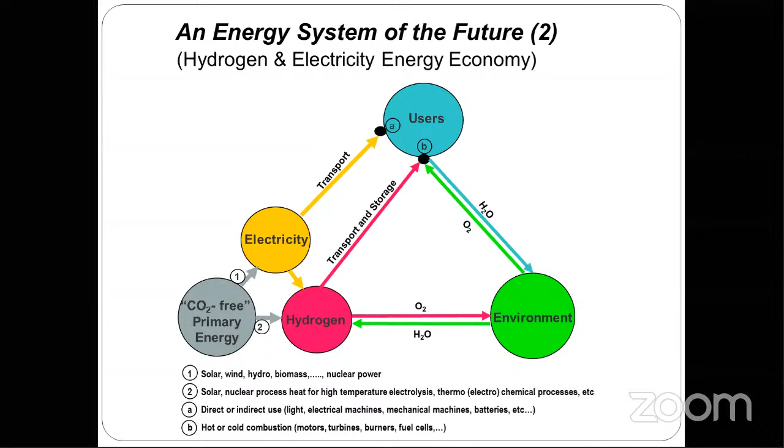So here I can show one more example of a wind hydrogen system in Norway. They are using the same kind of technology to store energy from wind energy on an island that is not able to connect to the grid. What they are doing is generating power using wind farms.

As I know, wind energy is intermittent in nature, you cannot get a continuous same amount. So some amount of energy will be stored as hydrogen using an electrolyzer, and the same thing you can convert back to electricity whenever wind power supply to the grid is less. So this is one more example, in Norway Island, of the same technology.

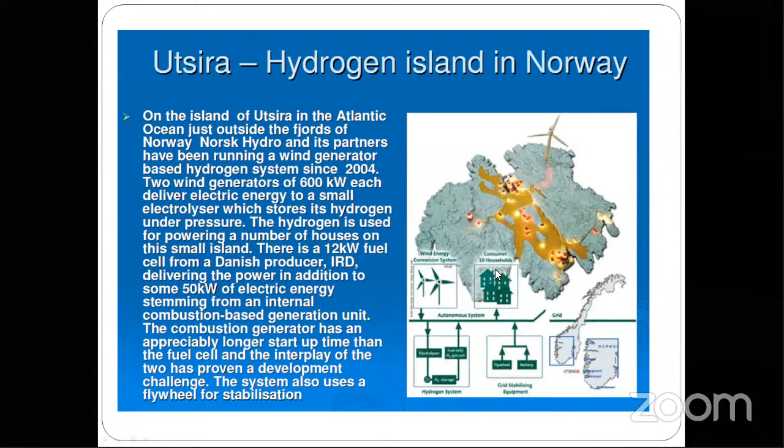Then you can see what are the challenges for hydrogen economy. First, obviously the production side - the price of hydrogen generation has to go low, because now the cost is around $10 per kg of hydrogen. It has to go below that, then only it can sustain.

Then coming to storage, we still have to develop efficient storage media to satisfy all the conditions set by the DOE. Again for distribution, we have problems like delivery - the pipeline infrastructure has to be created for the entire country. That is the major drawback. Then for utilization, other than fuel cells, we have to have other applications like for cooking, and various other applications. We have to do research for hydrogen-based systems.

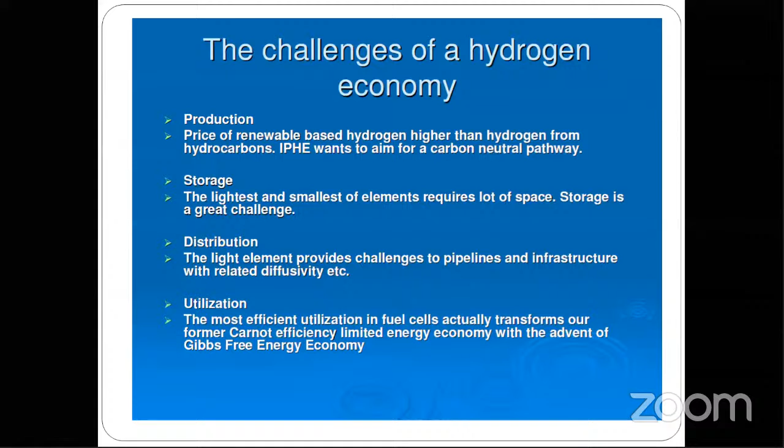So thank you. If you have any doubts, I can clear them.